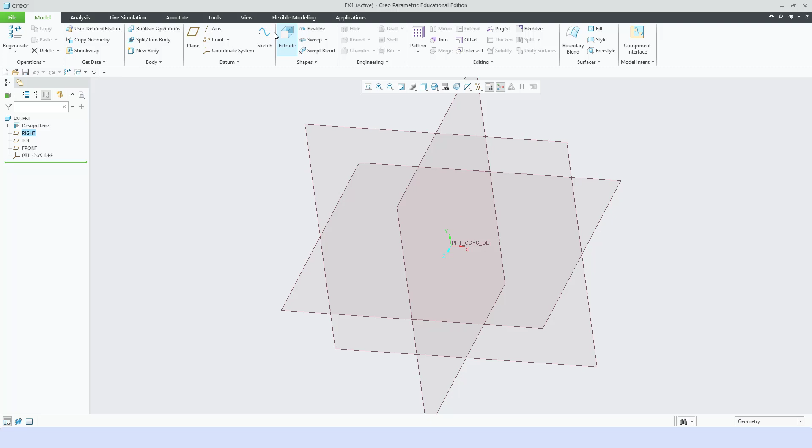Set work directory, that is the better thing. So here I am going to use my folder and select that as a work directory. Now go to new, as usual, select the part. Okay, let us name it as ex1. Give OK. First go to sketch, select this sketching plane, give sketch, come to this sketch view.

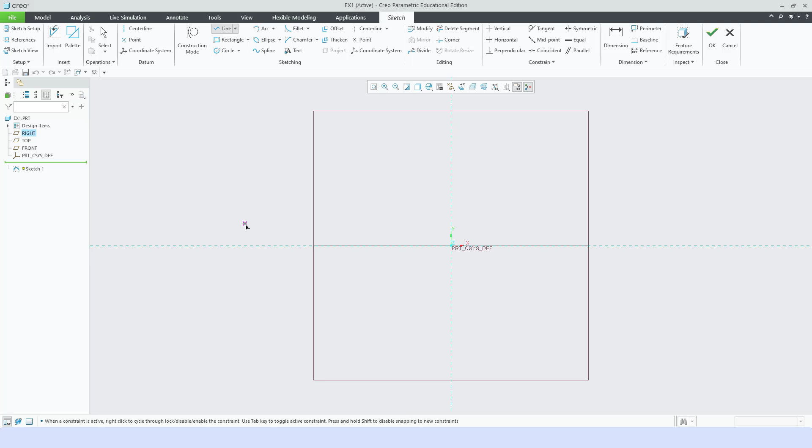Okay, if you hold the cursor there, it will show you. Okay, sketch view. Now we are going to create that V portion. So always you have to set the dimension first. Okay, go to line, select this point and draw a single line. Here for my convenience I am drawing on the reference line itself and press the middle button twice or press escape twice, so that we will come out of that line.

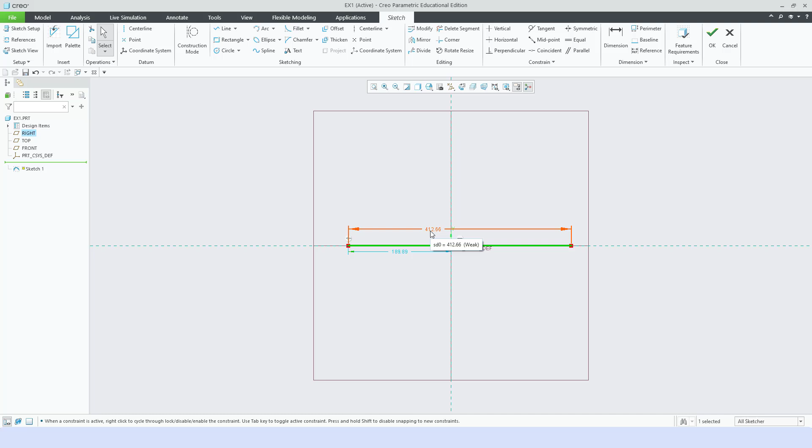And now you could see the dimensions. Our dimension is only 40 but it is 400. So first you draw a single line, change the dimension and it will re-scale it automatically. Okay, so this is the first step that you have to do, particularly learners. If you are learning this software for the first time, it is convenient for you to draw a single line, change the dimension for that line as per your requirement, so that the entire model is scaled down to your requirement.

Okay, now we have to put it in the middle. We have to make that line in the middle because the V block is coming. Generally, if an object is there, we will try to put it in the middle of that reference line. In this case, the V portion is going to come above in the center, so it is compulsory that you have to bring it to the middle. Okay, so 40 and 20.

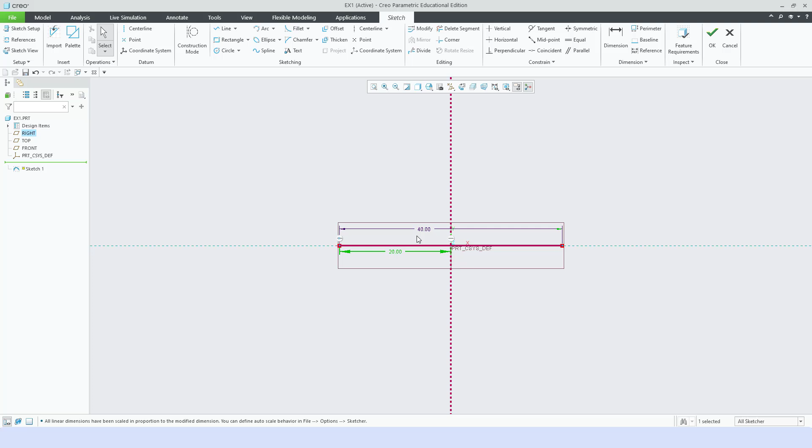Once you have set this, now go and draw the other lines. A vertical line, and maybe you just draw this line and change the dimension. This dimension is 50, as we have seen. Now fit this. Okay, refit. So now you could see the shape of the component you have achieved. It will be easy for you to draw lines now.

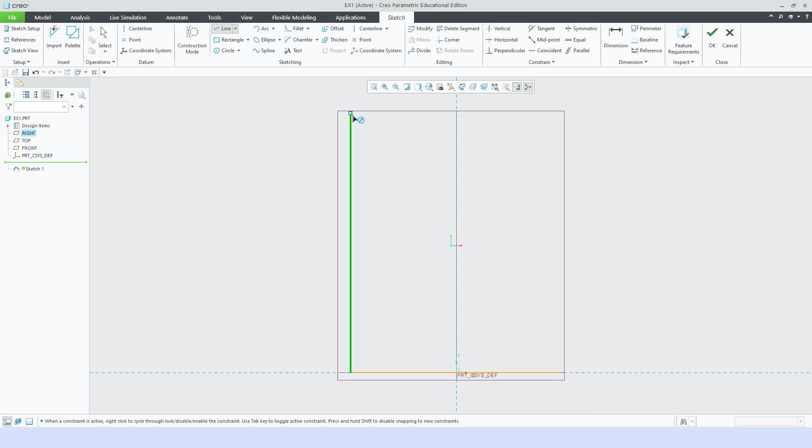Just draw a horizontal line and this V block line and another one here. Okay, or probably you just draw one side. That will be easy for you. Set the dimensions and then complete the other thing. Now this dimension, go to dimension.

Okay, to change the dimension, go to dimension here. Come closer to the dimension; it will be highlighted. Double click that and enter the value. It will be 10 in this case.

And the other dimension is from this line. The angle is not given, but the vertical distance is given. Our dimension command is already there. Select this line and this point, come to this region and press the middle button. To create the dimension, you have to press the middle button. So the vertical dimension is coming. This is 15, which is what is given, right?

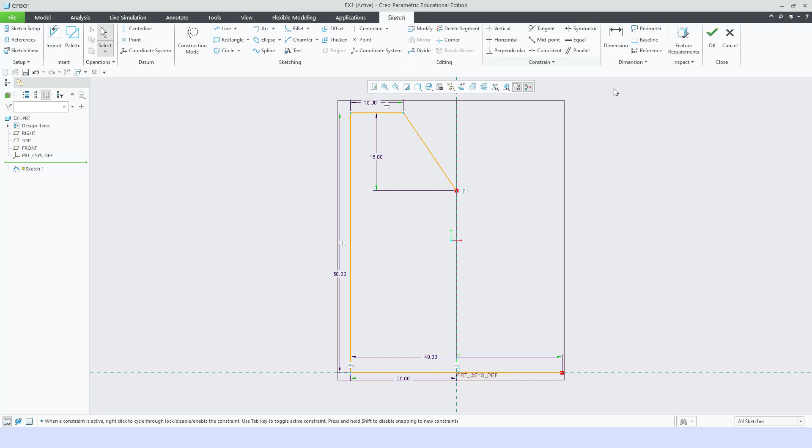So for creating the dimensions, go to dimension, select this line, select the point, come here and press the middle button. So the dimension will be created. Now press the middle button so that it will come out of the dimension command. Now you have come out of the dimension command, go to line. Go to line, draw these lines.

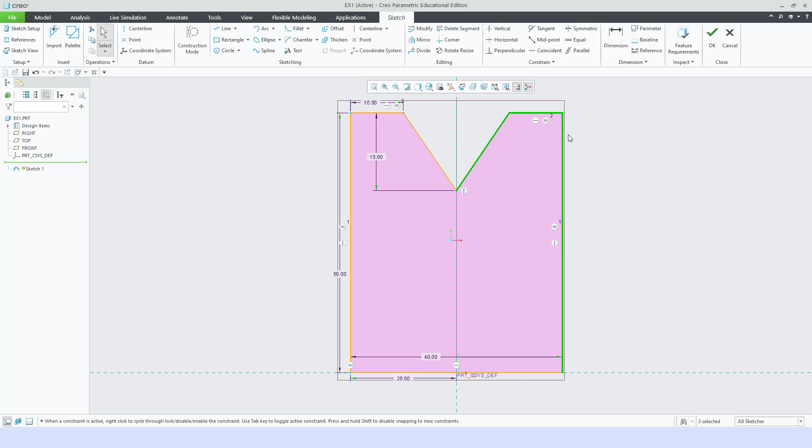From the base. See, now you can make it equal. When you go closer, it will become equal. And this line, when it is highlighted in green, it is equal, and this will also be equal. So the other side you can easily draw. You can even do symmetry, you can mirror it, but generally this is easy for you. So you finish it. The sketch is completed.

Now go to extrude and select this sketch. When you move the cursor closer to the sketch, it will be highlighted. Select that, then it will be extruded. So you can extrude and give the distance. This distance we have to give, which is 60. It is 45 coming, we have to make it 60. So this is the dimension.

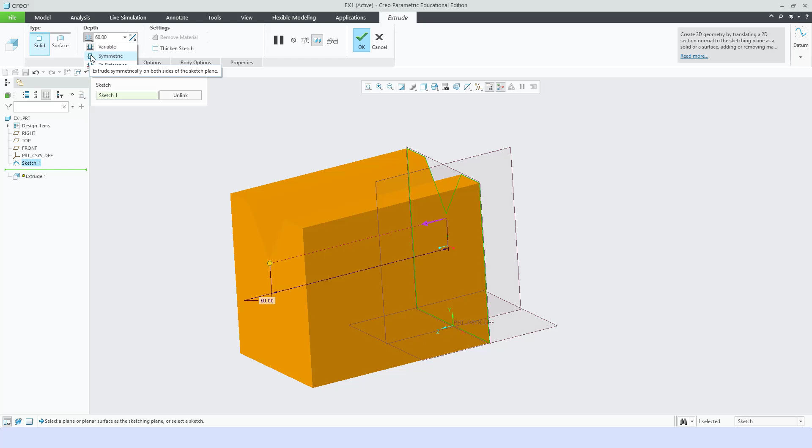Now you can finish it as it is also, but for my convenience I'll use this command, symmetric. We have to learn the various options also. If you use symmetry, the material will be added on both sides of the sketch, as you can see on the screen. It is optional only, it is not compulsory. Once you do it, finish it. So the first portion is over now, right?

Now we will come to the base. Look at the dimension of the base: it is 80, height 20, but on the other side 100. We are going to draw the bottom surface, the surface where this rectangular V portion is going to rest. We are drawing the bottom.

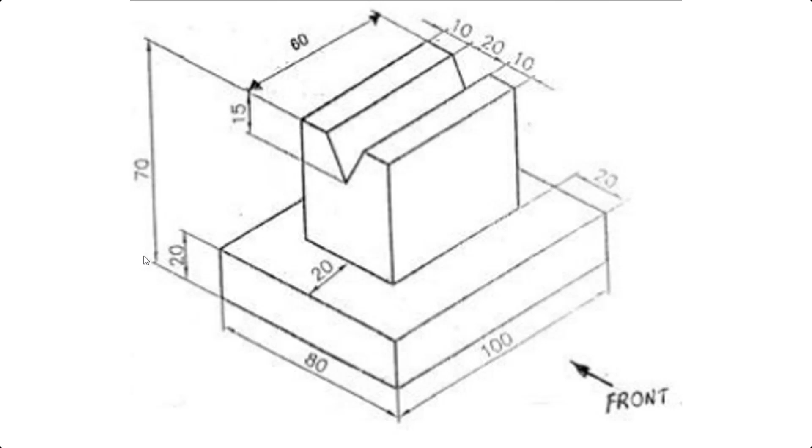Which means we are going to create a rectangle of 80 cross 100. The 100 should be oriented along the 60 length, and the 80 along the 40 length of that V block, and then extrude it for 20 units. So this is how we are going to create this model. We will create the base block in the bottom surface. So let us look at the dimensions. We will do it now.

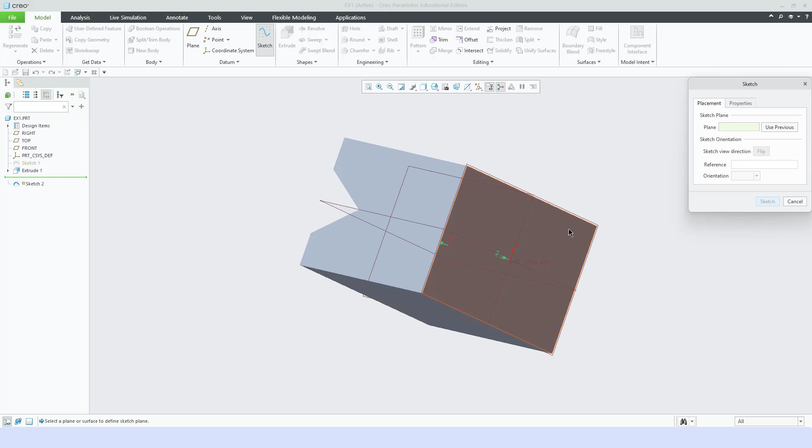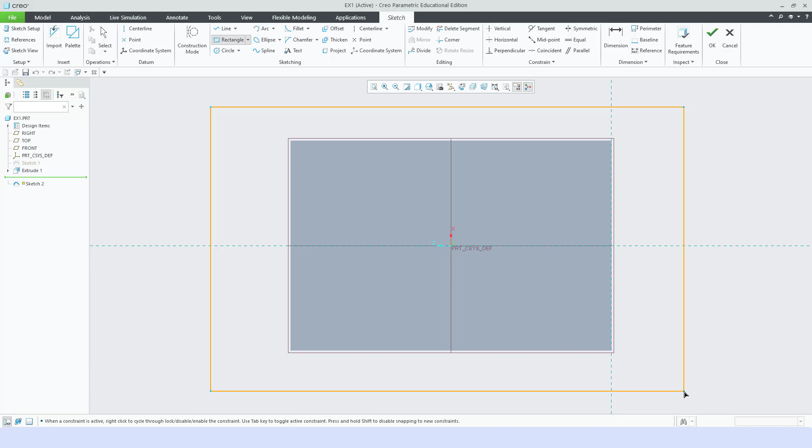Go to sketch, select this sketching plane, the base plane, and give sketch and sketch view. See, it will come like this. Now we need to just draw a rectangle. Go to rectangle, completely outside this object. Give a start point, move it and end it completely outside, so nowhere is it in contact. So just draw a rectangle like this.

Now give the dimensions. In the 60 units length direction, it will be 100. So this dimension is 100. We have to put it in the middle; I will come back to that. And this dimension is 80. Now this one we have to put in the middle. You can select a dimension, hold the left button and move it. Double click it, it is 40. So it is coming in the middle.

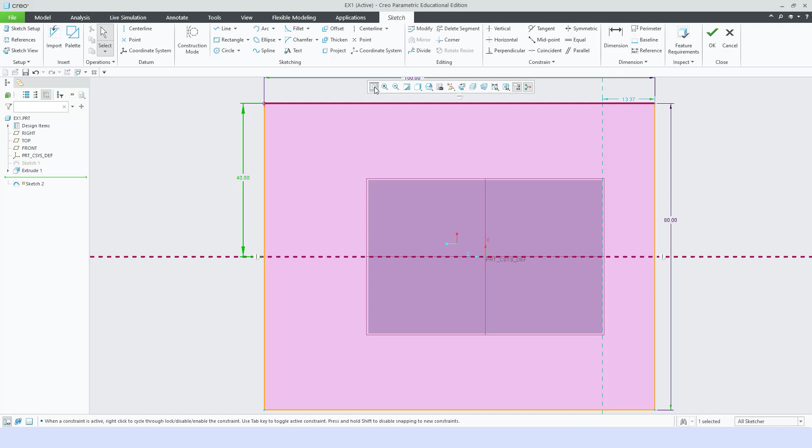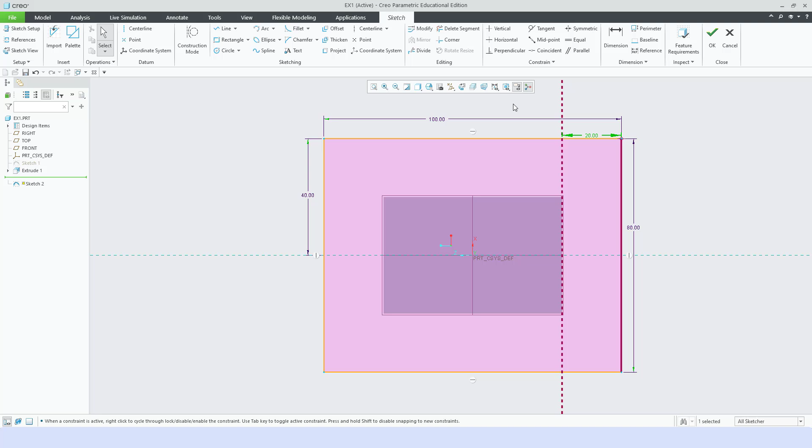Now this is put in the middle, but for the other side, you see the dimension is coming from the previous block. Actually this distance is 20, you can give it as 20, or else you can create a dimension from the center plane to this also. So here you can calculate the dimensions and give it as 20. Now this is done. We have created 100 cross 80 and put it in the middle, finish it. The sketch is completed.

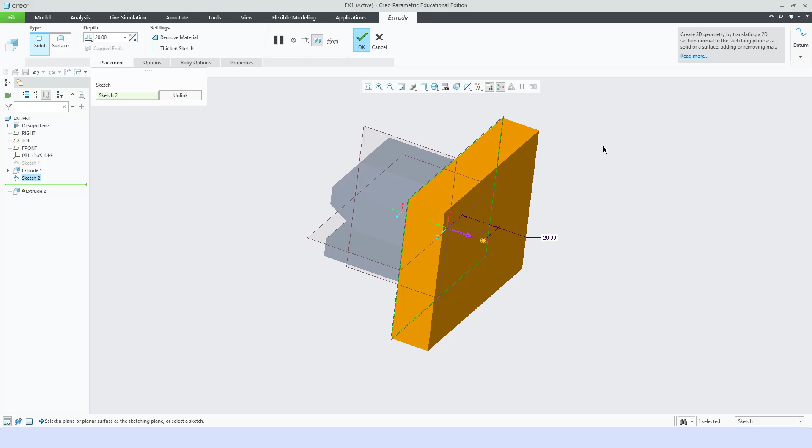Go to extrude, select this sketch, it will be extruded. Let me change the dimension, it is only 20. See, it is 20. That's all. The model is completed now. You can go to file, save. The name is already given, so it is saved. You can see at the bottom left of the screen, exercise 1 has been saved.